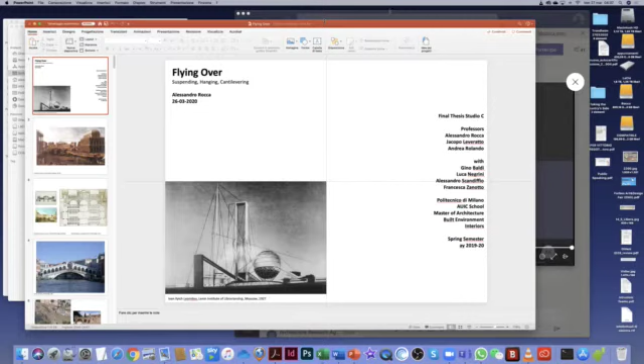Is the bridge. Of course, the bridge is the suspended architecture par excellence, and the bridge is, as you have seen, a typical rest area architecture in Italy, and not just in Italy, also in France, also in Switzerland, and in the United States too. And the bridge as a building is very recurrent, and is a typical landmark of the highways.

So I go back to this famous Capriccio by Canaletto, painted by Canaletto, with the project that Andrea Palladio did for a competition at the end of the 16th century for the bridge of Rialto. The idea of Palladio was to make a bridge as a building, or to make a building as a bridge, a building that can cross the Canal Grande, the great canal of Venice, but also can create a space, can give space to some functions, activities, so transforming the bridge that, of course by its nature is a connection, into a centrality, into a point of arrival, and not just a point of transition, of crossing.

This is another Capriccio by Canaletto, and the big image is the project by Andrea Palladio. The project was never built, but it's very interesting - this idea of creating a complexity of space over the bridge, with a series of volumes, of open spaces, of closed spaces, of different paths, different hallways, etc. And of course, with the two important connections to the shore of the canal on the two sides.

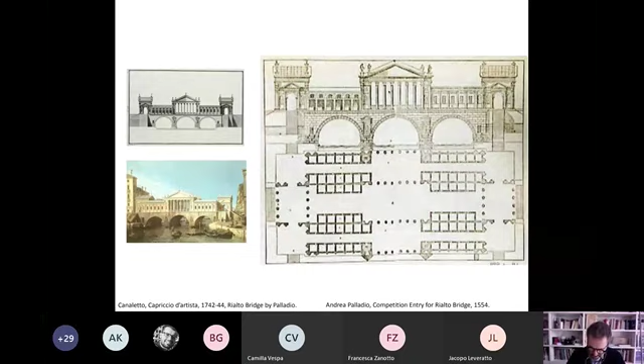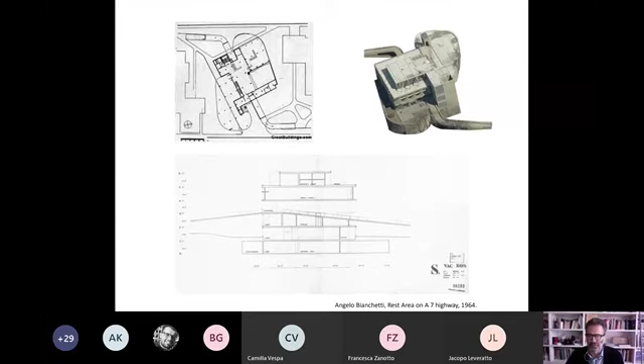So we can also imagine that the connection we need to cross the highway, to pass over the highway, can be part of the architectural conception of our buildings.

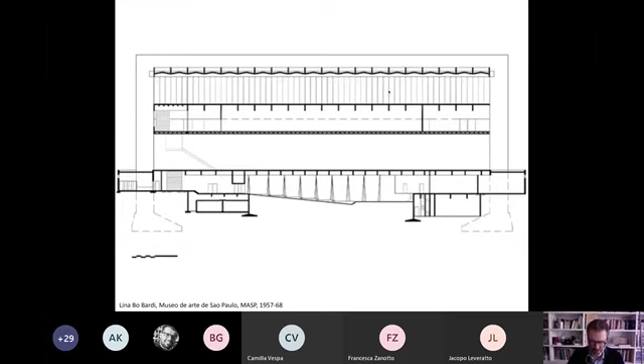You see here the section of the building. There is another part underground, important, and the main part with the most important exhibition is hung from the portals. This is from a book of sections, and it's very clear.

There is this terrace part below that is very related to the orography of the soil, which here is very important, because it goes down to the left, the level of the city, down to the historic center, and on the right we have the Avenida Paulista, at the top of a hill running over a mountain. So the plaza is suspended over the city on the left side, and on the other side is just the ground for the elevated part of the museum.

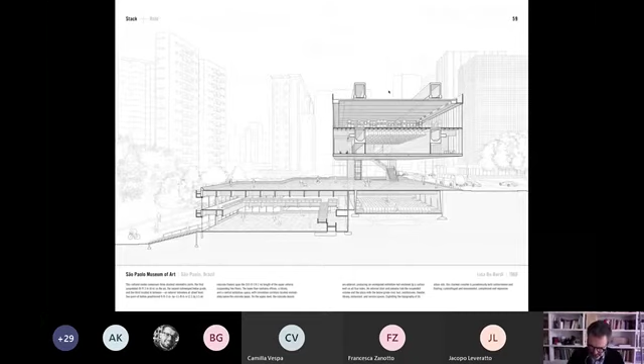So this openness that you find below on the platform, at the ground level, the city level, is repeated in the bridge, in the suspended part. It's one huge open space where you can arrange exhibitions completely freely.

Okay, going back to our highways, we see here the first, more or less, autogrill, the first restaurant for the rest areas.

You see that here Angelo Bianchetti, the main architect of the rest areas, started with this idea of projecting into the sky, creating something very visible as a landmark, very clear, very expressive as a structure. You see two different structures.

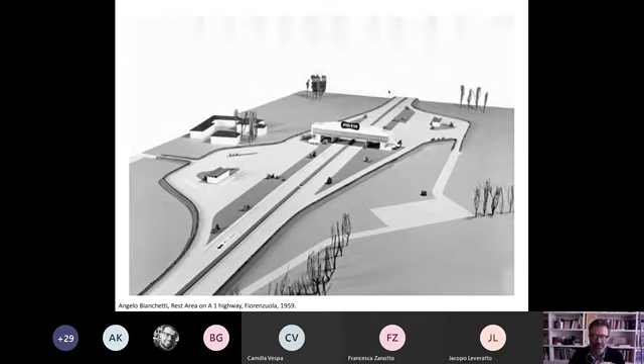And this is the Pavesi, the restaurant that crosses the highway and connects the two areas. This also maintains the duplicity of the building and the landmark. You see the two towers at the two feet of the bridge, completely independent, just there to hold up the Pavesi sign.

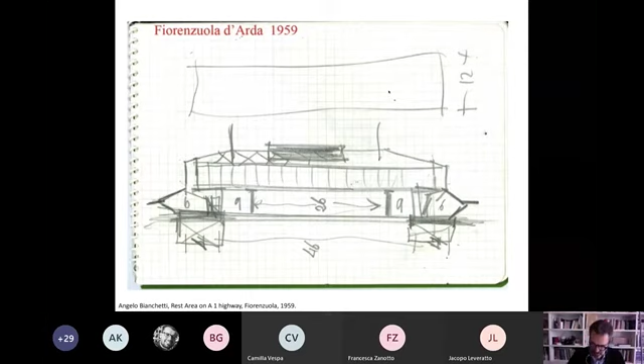This is an interesting sketch made by Angelo Bianchetti with the rest area. Also with the size, we see, for example, that it's probably 9 meters high from street level. The building has a span of 26 meters between the pillars, and the structural idea is very important. Also the distribution with the two stairs at the two feet of the building, 12 meters wide.

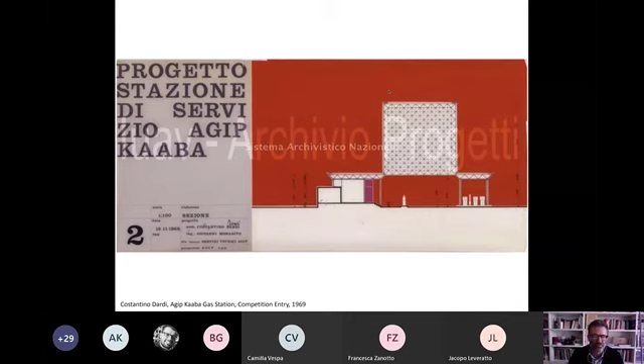This is another project that was never built, completely different, more or less from the same years, 1969 - a gas station designed by architect Costantino Dardi, based on a completely different idea. It's an idea of detaching the sign from the building again, but also an idea of lightness, of transparency - the opposite, in a way, of the Bianchetti approach.

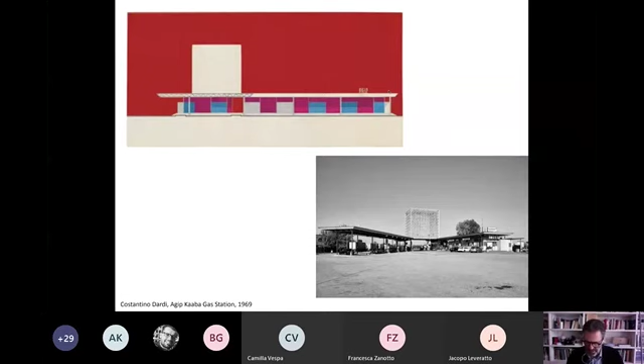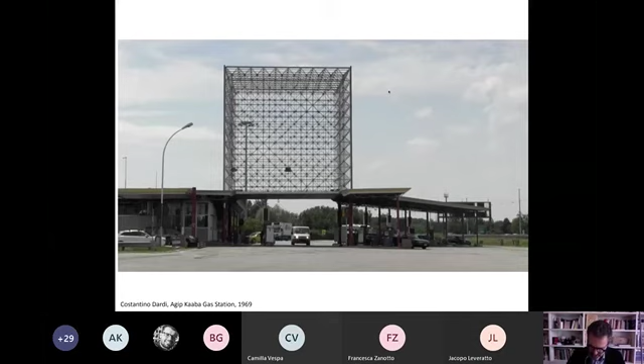This is near Venice, and this is a drawing of a competition entry, with the realized rest area on the right. You see here this perfect cube, this geometrical shape, like the Luca Pacioli cube, the Renaissance cube, the perfect measure of everything - maybe ironically, I don't know, suspended over the oil station, the gas station.

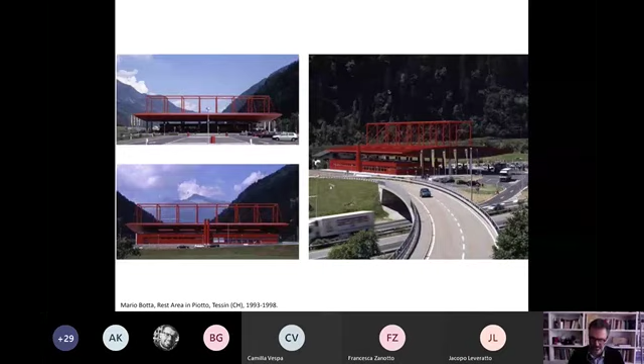This is another interesting restaurant and rest area in Tessin, Switzerland, designed by Mario Botta. Here again technology is important, structure is important, and again the structure is used to create a strong image at the border of the highway. Again the color is important - like many Bianchetti buildings were painted in orange or brilliant colors, this one is completely red, like the Kilometro Rosso.

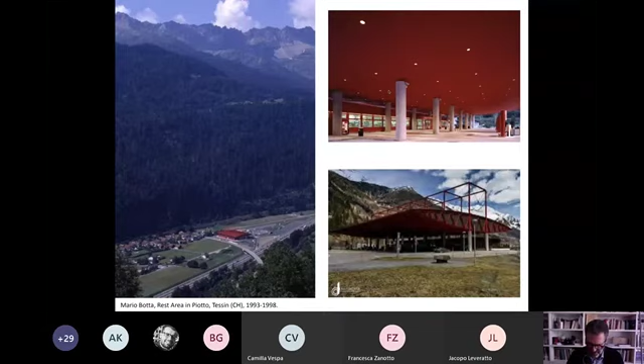You see, for example, an interesting detail on the left. The orography is very alpine, of course - Tessin is an Alp valley, and the building has a relation with the highway, but also a relation with the street that crosses and overpasses the highway, and a strong connection with the village that you see on the left of the building. Then on the right, you see the importance of the open space, the canopy where people and cars pass, and the relevance of the structure, of course.

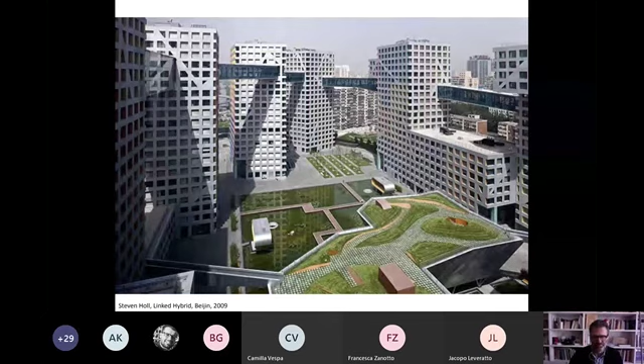This is another project, nothing to do with a highway, though it is really at the border of an urban highway in Beijing. What is interesting for us, for our project, is the idea of creating a central space, a series of detached buildings, and making a connection in height, creating this bridge that connects the entire compound at a very high level. This is Steven Holl's Linked Hybrid in Beijing.

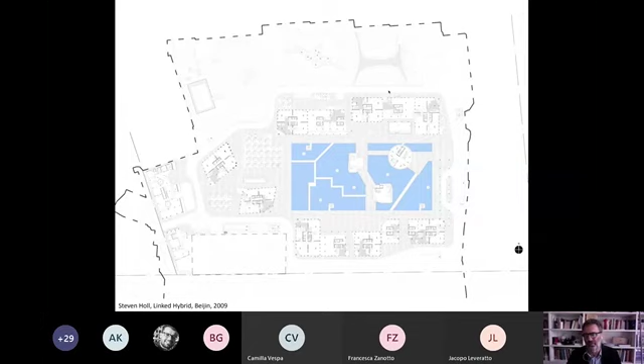What is also interesting for me is the typology - not very hybrid, but very simple and very flexible. All the buildings have a very clear structure, a central core, a clear form, and can be used in many different ways. So the character of the building is given mostly by the quality of the central space and the character of the connection at the high level, because the buildings themselves are more or less the same and presented as a background - not expressive, just a simple grid of windows and the concrete structure.

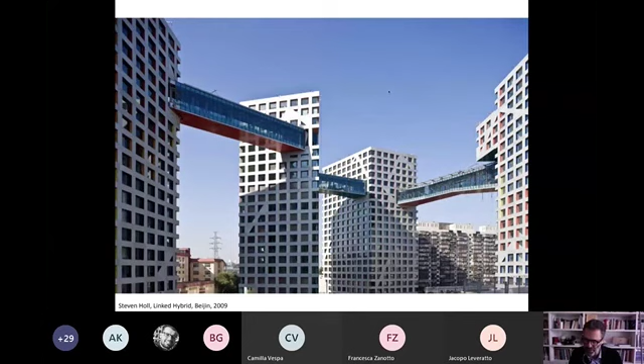With these interesting details, for example, the colors you see in the windows - yellow, blue, red. And in the bridge are the special functions: there is an art gallery, a cafe, a book event space, a viewing platform - because this idea of viewing, of observing, is very important.

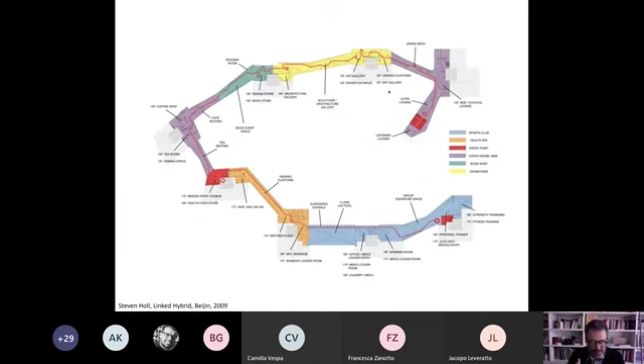The bridge, like the Bianchetti Bridge Restaurant, is a very new and fascinating point of view over the highway. To go up and sit and look at the cars passing is a spectacle in itself - the spectacle of the movement.

This is another image of the central plaza or courtyard, and you see on the right there is the highway - the highway connecting the main airport of Beijing with the city center.

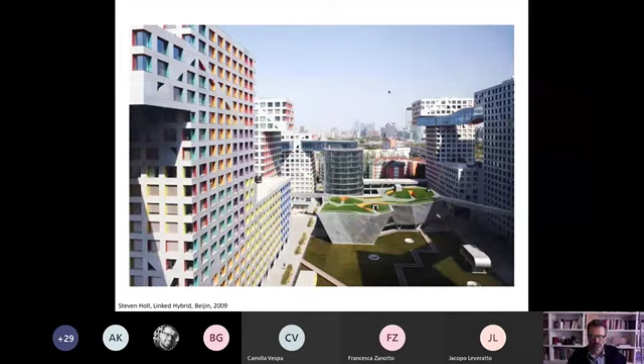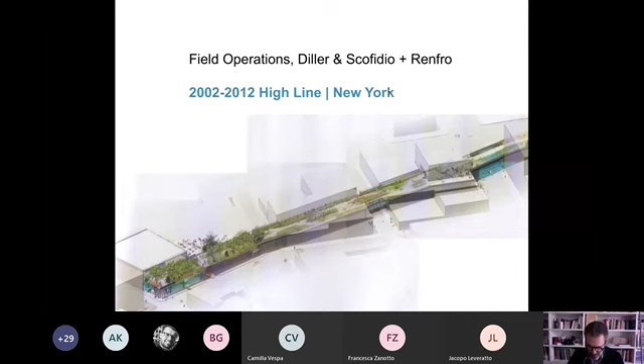This is another project that Andrea Rolando showed you before, the High Line of New York. This is a project of recovering an abandoned, elevated railway as a linear garden at the service of the citizens, a new public space. It's very famous, but I think it's interesting for us to look at this from our specific point of view of creating elevated, interesting spaces, because maybe we want to cross a highway. So it's important that we transform passing over the highway into something with quality, because simple bridges are always neglected, harsh, not comfortable, not very appealing spaces. Transforming this idea of passing over into an interesting, quality experience is relevant for our project.

This is the railway as it was before the intervention, abandoned after the train was completely dismissed, with nature growing up over the infrastructure. These are explorations of this wilderness, this wild place where nature was growing without the presence of man for some decades.

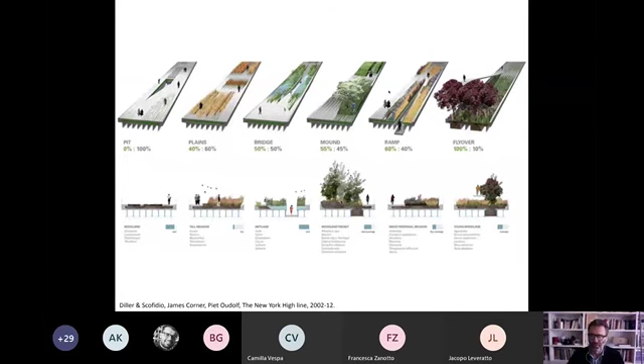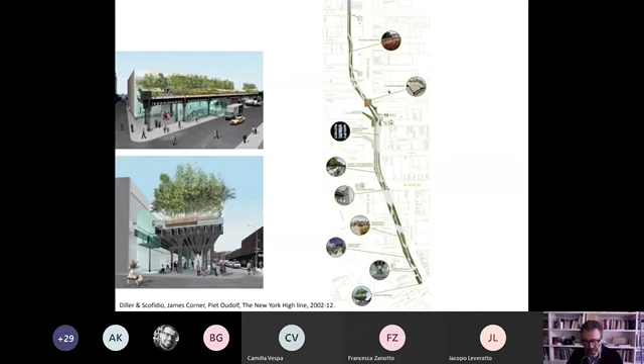These are drawings made by James Corner, I think, showing how to treat the surfaces, how to distribute the plants, how to bring nature over there, how to connect different levels. These are drawings, a general diagram like a master plan of the intervention with some zooms. And these are images, probably familiar to you, of the New York High Line, this elevated level over the city level, with interesting details, etc.

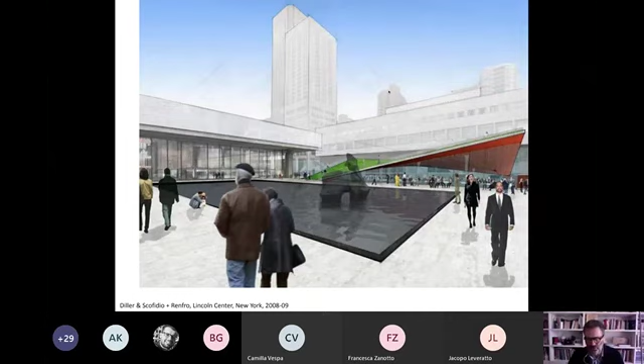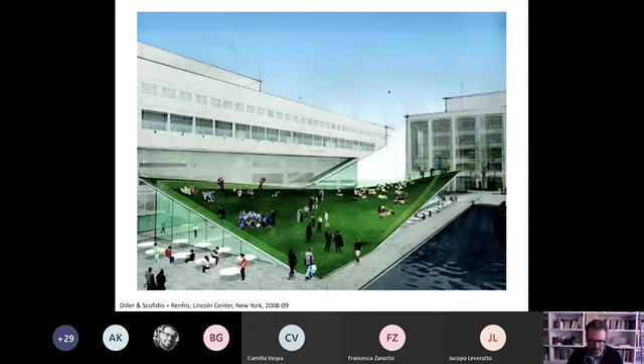This is another project that I think is interesting for us, related to this idea of gaining another level, of transforming the soil into something that can fly, can go up. This is a project by Diller Scofidio inside the Lincoln Center, the Hypar Pavilion, a pavilion mostly for restaurant events, which could work exactly like a rest area facility. The idea is that the soil goes up, maintaining the grassland but also freeing the space below, transforming the lawn into a roof, inhabiting the grassland above and below, creating an interesting, super artificial space with an important natural component. And these are images of this grass.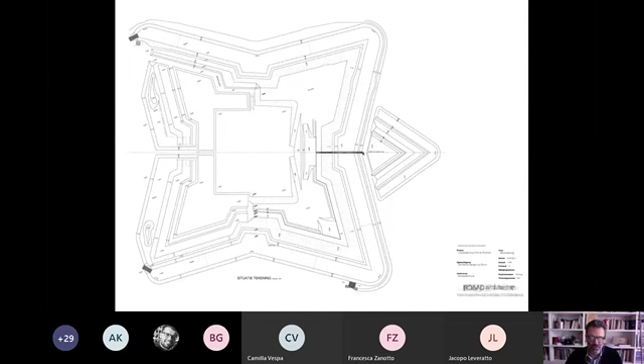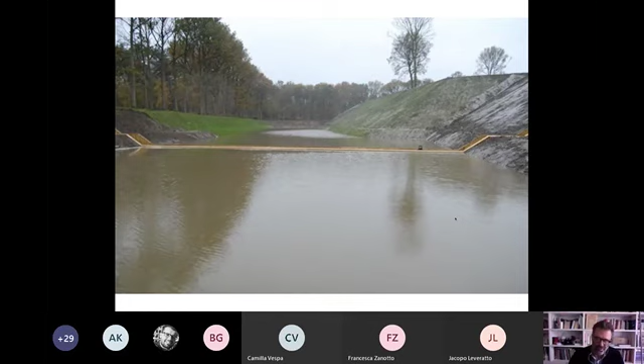This is another very strange way to overpass a canal - the Moses Bridge, made inside an ancient fortress in West Brabant, Netherlands. The trick is that what you pass is not a canal, but the water made by the defensive moat around the fortress, so it's very calm water, always the same. They excavated the water in a way, creating a passage through it at this point, allowing people to visit the fortress. So the idea is making something quite invisible, completely inserted into the landscape, into the ground on the two shores, and into the water in the middle. The experience is tactile, but also visual - to pass through a place that's normally not accessible, and to have perception of the infrastructure, because this is a very close and very peculiar infrastructure.

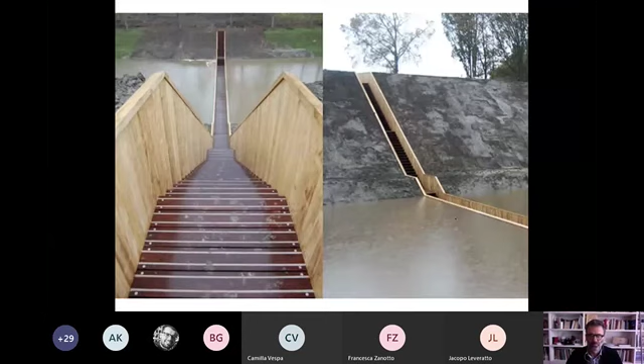So, other images of the stairs, showing how people cross the canal, through the canal.

Another question that is relevant for passing from one side to the other of the highway is wildlife crossing. The highway is a problem for many animals, and many die crossing or trying to cross it. In our highway, this problem is limited because we have a lot of tunnels.

Animals in the countryside through the mountains are well connected, but wildlife crossings can also be a spectacular aspect, a theme of a project, something that allows passage for the animals, but also explains to people how to respect the life of animals, how to get in contact with them, and how to have a perception of the natural environment around the highway and the rest area.

Mostly these wildlife crossings that exist on our highways are just tunnels, very dark, very sad, not interesting, without any other goal than allowing the animals to pass.

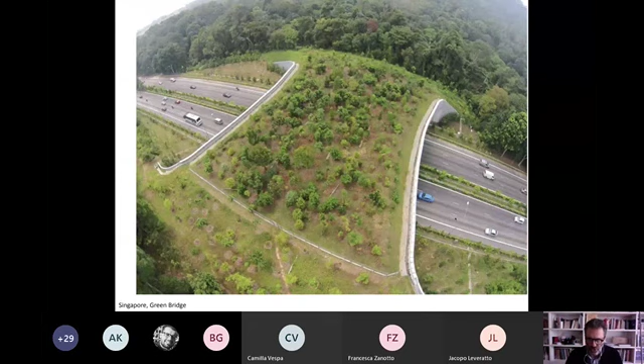These green bridges can become important architectural elements, changing the landscape in a strong way, and also making the highway better, entering in resonance with the landscape, mediating a relation that is often very hard, because the highway has a strong impact over the landscape.

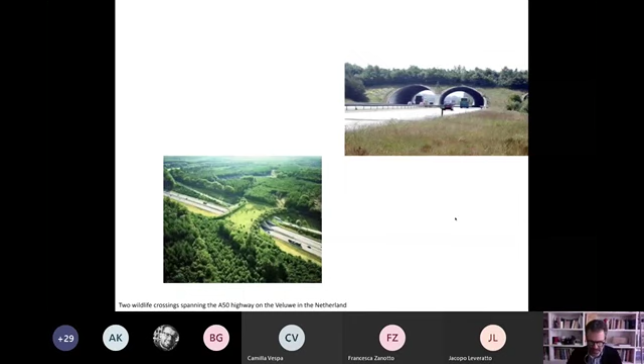These are other samples: A50 highway in the Netherlands, this one in Canada, and this is a more designed natural connection in Vancouver.

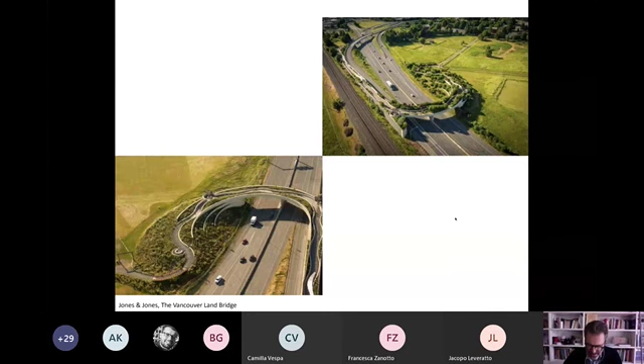This is the land bridge, a bridge that is not like a building, but more like a garden.

Cantilevering is another typical topic for high-tech architecture, for highways, for rest areas, for gas stations. It is a tradition in gas stations to cantilever the roof, to give this idea of technology, of futuristic architecture. Again, we can start from a USSR project.

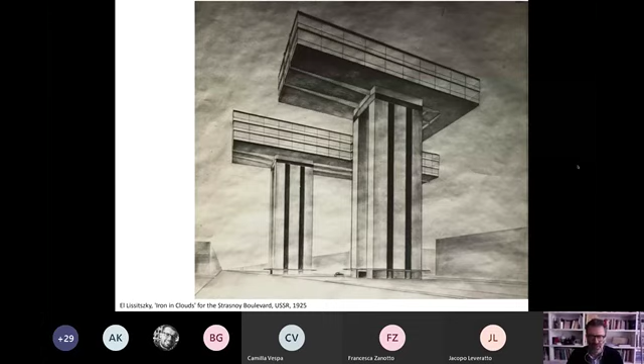This is the Lissitzky iron in clouds, because cantilevering, like for Leonidov, is a very strong sign of the future, of strength, of dynamism, and also produces an interesting landmark. Cantilevering always creates a point of interest, something special, something different.

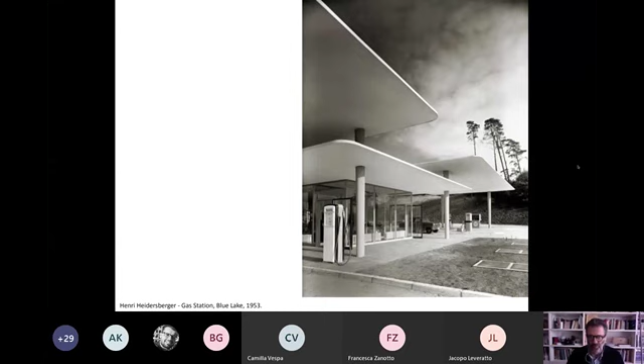This is another beautiful service station, a gas station in France from the 50s, where the structure and form are so strong as to create a canopy for the furnishing of the gas dispenser, but also to create a very strong image.

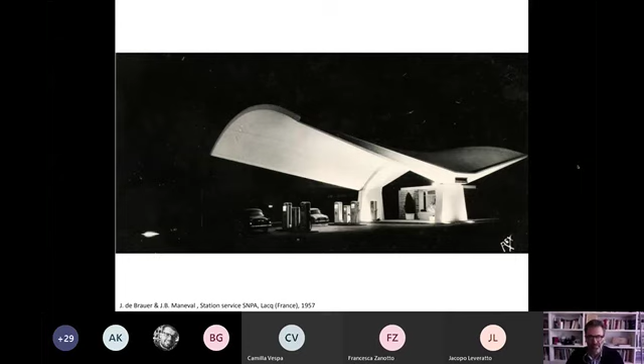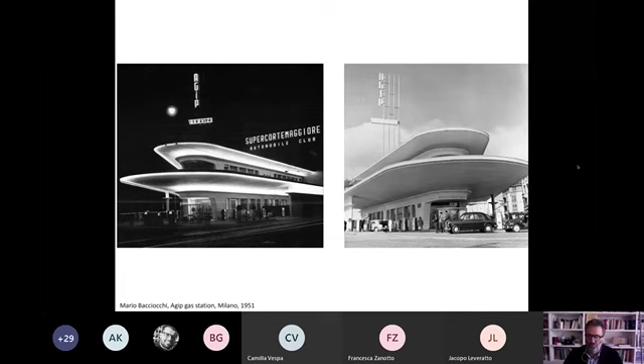This is a very famous gas station in Milan, still existing, at Corso Sempione, Piazzale Accursio, by Mario Bacciocchi. It's based on the idea of cantilevering, of expanding the canopy to give the activity of gas delivery a strong, super strong landmark.

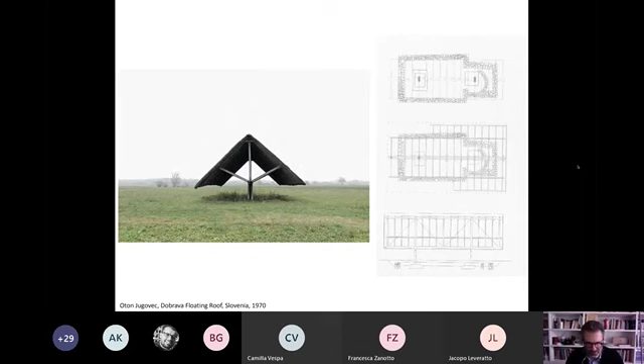This is another beautiful cantilever. This is not a gas station, but a covering, a canopy for a small archaeological site, the remnant of an old church. This simple canopy, built with rural technology, becomes a beautiful presence in the landscape, a simple low-tech system covering the small archaeological site.

Okay, so I'll stop here.

I hope you can get some good reference from these samples, and that they give you some ideas. If you have any questions, please don't hesitate to write or speak about that. Thank you.